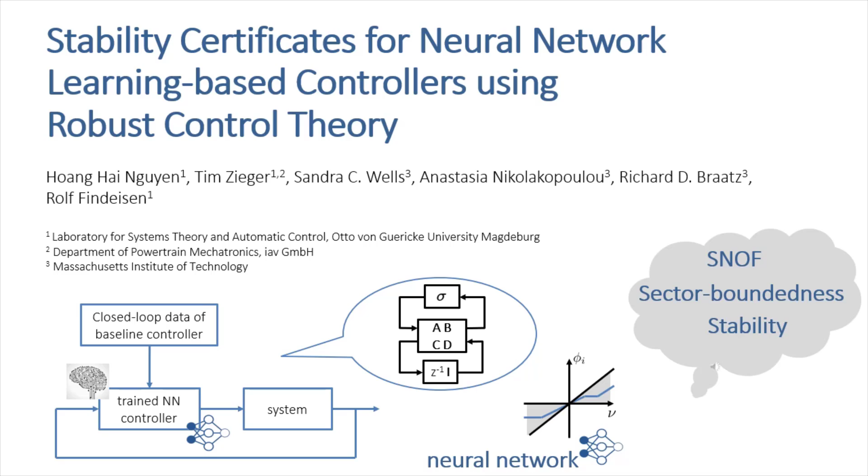In practice, we have many systems that are operated by a baseline controller that can deliver good closed-loop performance, and the nominal model of the plant can be obtained, but a mathematical description of the baseline controller is unknown. An example might be a human operating a car, where the dynamics of the car can be modeled sufficiently well, but a mathematical model of the human control actions is not available.

Or it can happen when baseline controllers are only available in hardware, as they have been designed a long time ago or by a different person, and we want to imitate the behavior of such a controller to implement on new hardware or to expand its range of operation. Another case is the existing baseline controller may be computationally expensive, for example MPC, which prevents us from using it in very fast or low-cost systems.

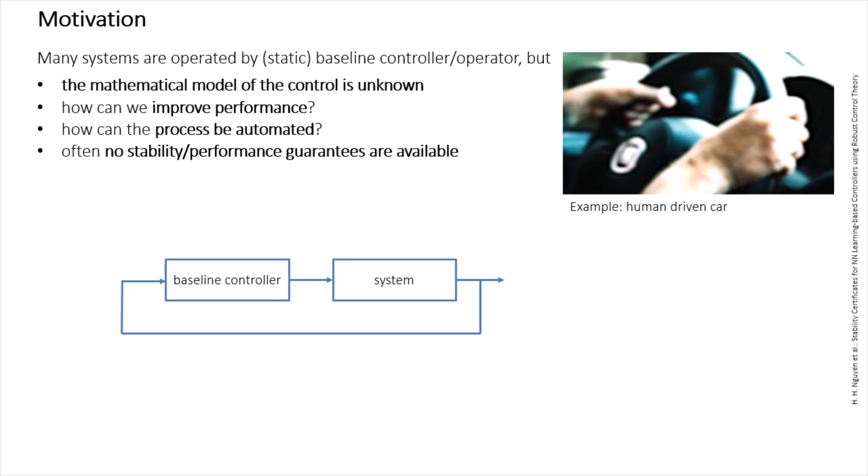In those scenarios, how can we improve performance and automate the process? And often in these cases, no stability guarantees are available. So the idea is we may want to approximate the baseline controller with a trained static neural network to imitate the baseline controller, for example the human operator as mentioned before, to decrease the computational load of the controller, and we can combine data with simulation.

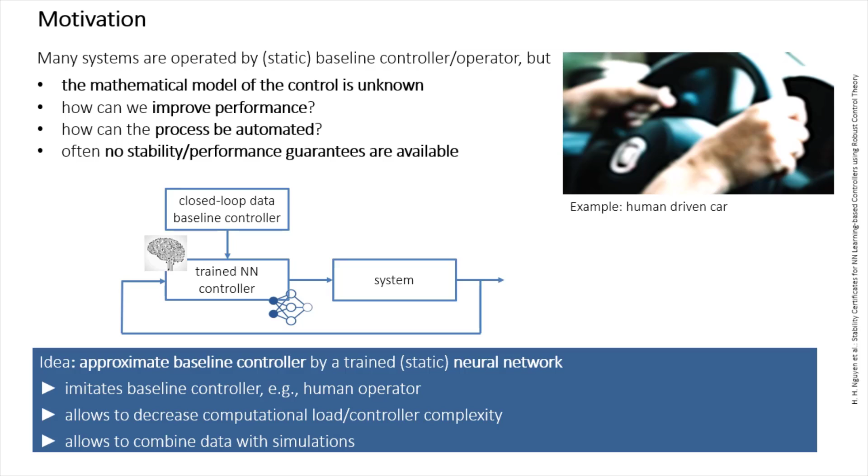So the first question is, can we verify performance and safety guarantees for the nominal system with a neural network learning-based controller? Second, what is the sensitivity and robustness of the system when it operates under disturbance? And last but not least, can guarantees be embedded in the training?

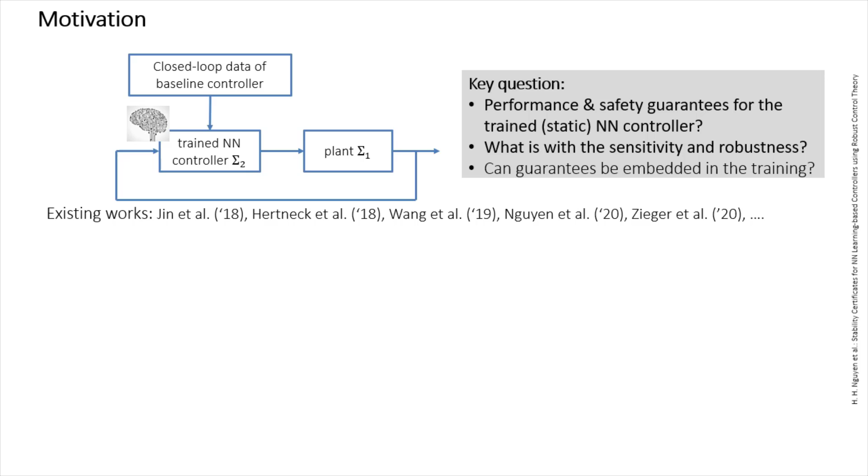There are several works that look into this direction and solve the problem for learning a specific type of controller or specific type of neural network. Can we have a framework to solve the problem? So we propose a different approach by using the tools from robust control theory.

We can use the fact that the most commonly used nonlinear activation functions for neural networks are sector-bounded, or can be transformed to be sector-bounded by using loop transformation techniques, and the slopes of those functions are also bounded. Basically, we reformulate the closed-loop system in the form of a diagonal nonlinear differential inclusion, or Lur'e differential inclusion, which means we decompose the closed loop into static nonlinearity and dynamic system, and use robust control stability results for controller verification.

The approach is motivated by the framework of Kim and others in 2018, which considers the stability analysis of open-loop dynamic artificial neural networks, where the neural network has one hidden layer only. Here we have extended the result to the case that the network can have more than one hidden layer, which includes the case of deep neural networks, and applied it to verify the stability of the closed-loop system.

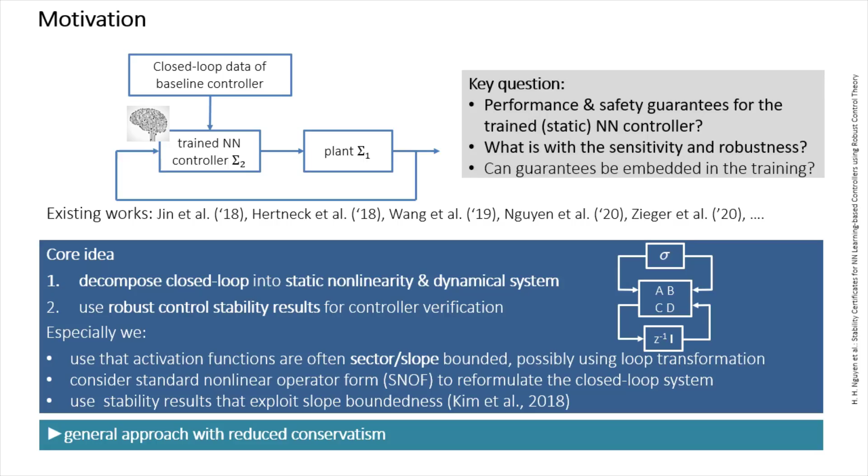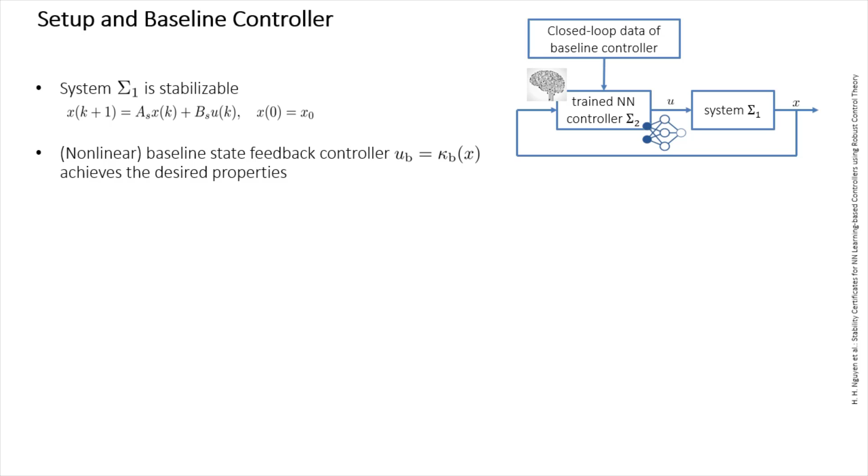The system to be controlled is linear, and we assume that the matrices A and B are known. The system is stabilizable and all states are observable. Assume that we have a baseline state feedback that achieves desired closed-loop properties, and then we can obtain a data set from this baseline controller to train the network that acts as the learning-based controller.

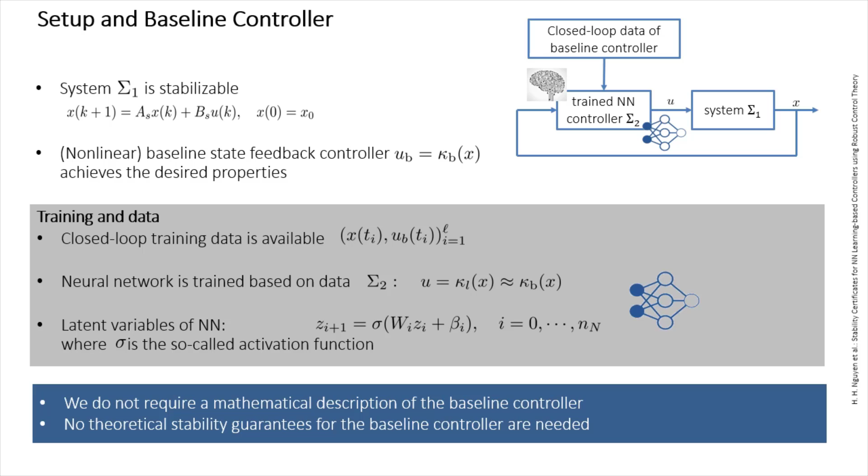By doing this, we don't need a mathematical description of the baseline controller, and we also don't require that the baseline controller provide theoretical guarantees, such as nominal closed-loop stability. For example, in the case of the human driving the car we mentioned previously, we want to imitate the behaviors, but the driver cannot provide any provable stability of the system from a theoretical perspective. But by using our approach, we can still verify the stability of the closed-loop system while imitating the behaviors.

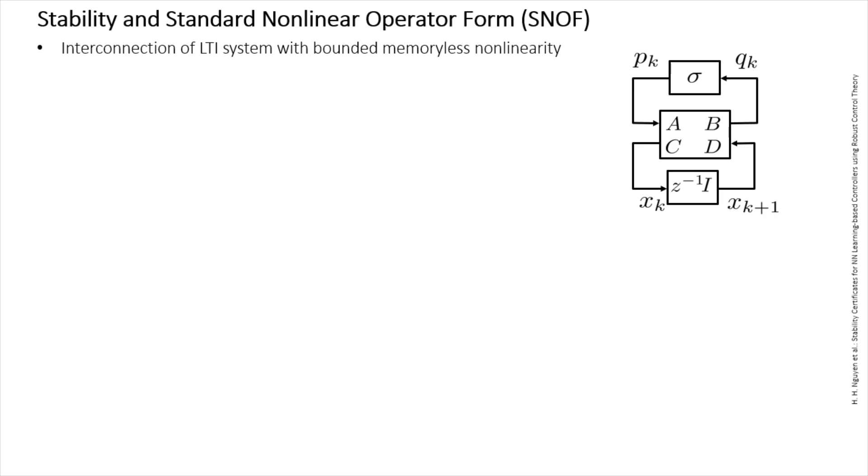The stability of systems with sector-bounded nonlinearities has been investigated since the 1940s. Such systems can be represented in the standard nonlinear operator form. So the SNOF is an interconnection of a linear time invariant dynamic system in feedback with a bounded memoryless nonlinearity, and it can be presented as in the figure.

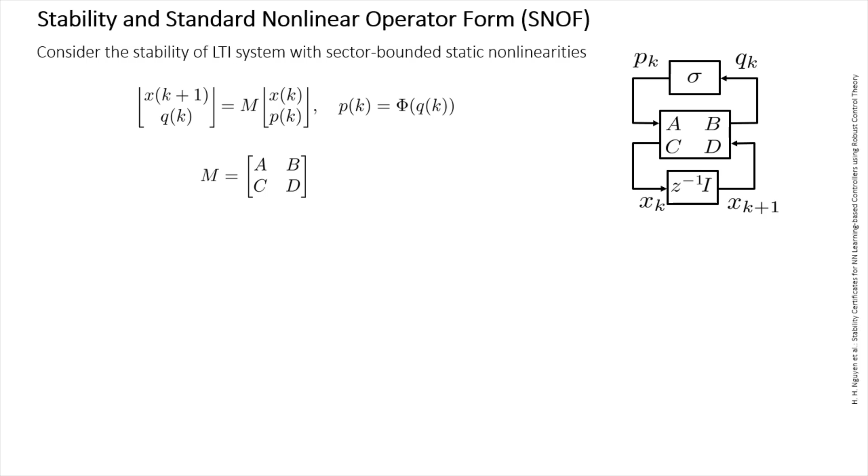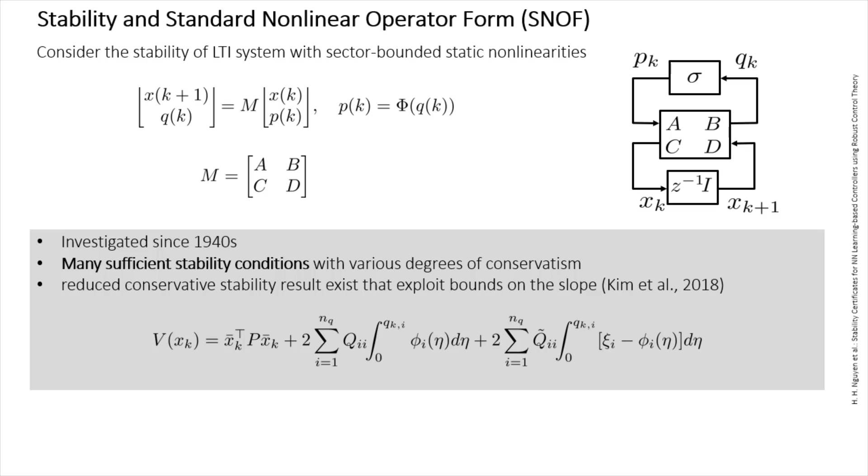Many sufficient stability conditions with various degrees of conservatism exist. By taking into account the bounded slope of the nonlinearity function, Kim and others in 2018 derived sufficient stability conditions that were less conservative than other methods. The basic idea is that in the Lyapunov function, a third term was added that reflects the bounded slope of the nonlinearity, and in this paper they conducted several benchmarks to compare the results with other approaches, showing that the results obtain the least conservatism.

So now the questions are, can this be used for neural network-based controllers in a reasonable way? And are neural networks slope sector-bounded?

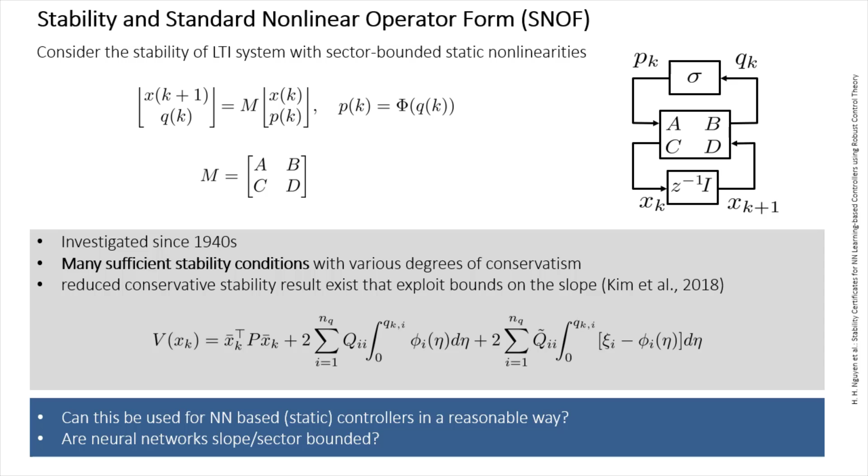So we can talk about the sector-bounded and slope-restricted nonlinearity. If we define the sector-bounded phi as being the region from 0 to xi, it means that it includes all the functions that lie in the region between the x-axis and the linear function that has a slope xi, which means the gray area in this figure.

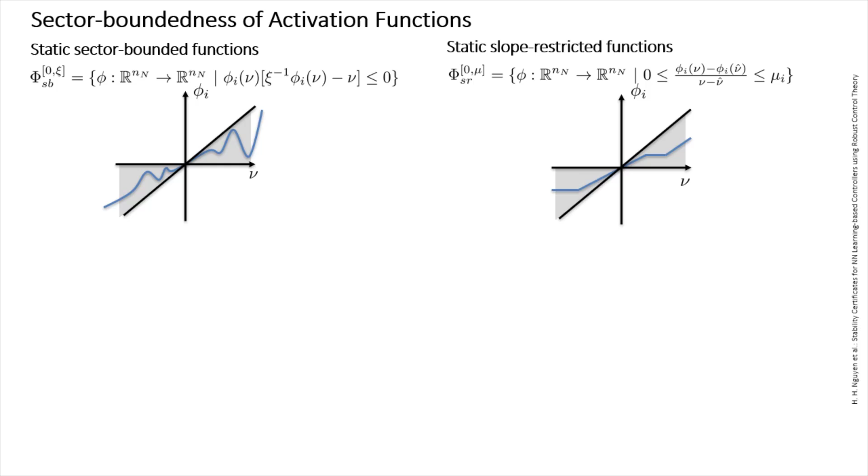And if we define the function as slope-restricted in the region from 0 to mu, it means the slope of the function is always in the range from 0 to mu. With these definitions, we can see that the ReLU and the tanh hyperbolic function are both sector-bounded and slope-bounded in the region from 0 to 1. But the sigmoid function is only slope-bounded, as you can see in the figure.

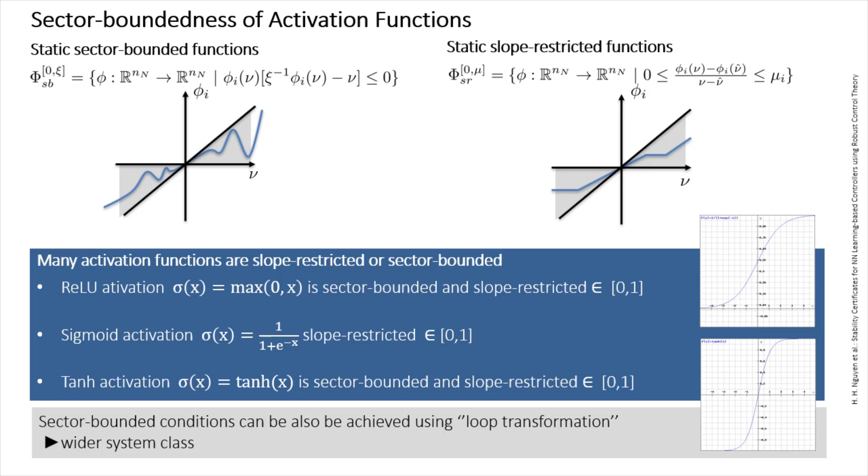However, there is a technique in nonlinear control called loop transformation that can transform this function into the sector-bounded function. So first, we need to reformulate our problem into the SNOF form and then apply the result for SNOF.

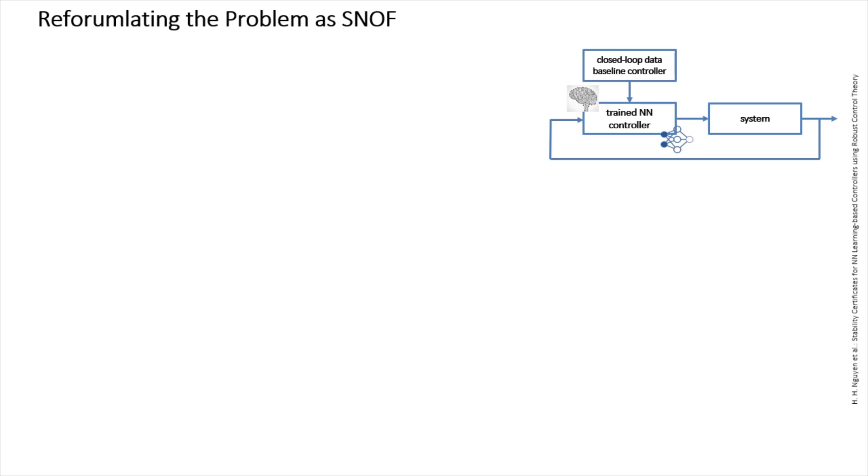The main idea here is that because the neural network contains both linear and nonlinear functions inside, we will use some auxiliary variables such that we can pull out the nonlinear function and separate all the nonlinearity into one part, and the other part only contains linear terms.

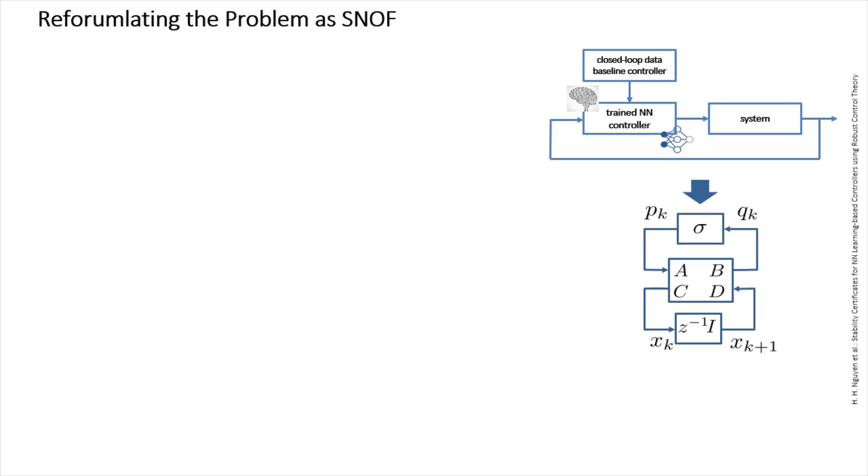Okay, so this is the equation describing the neural network variables. We can use the variables qi and pi here, and we can write the dynamics of the closed loop system in a big block like this.

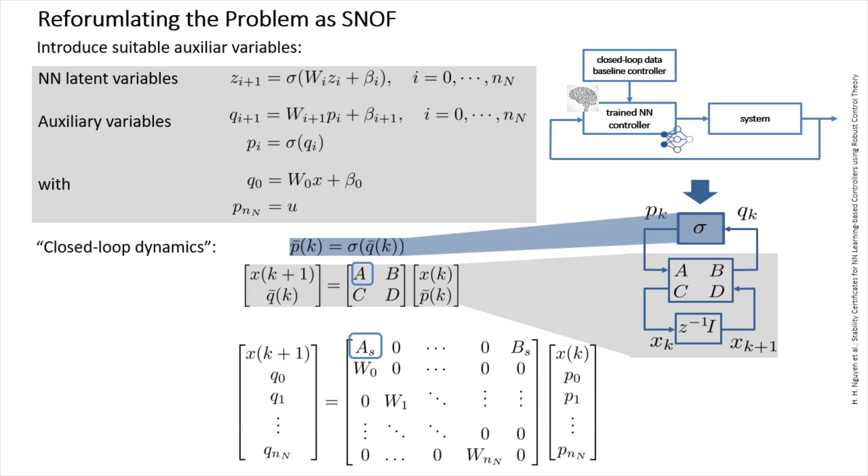If we compare it to the SNOF form, we can see that the matrix AS is corresponding to the matrix A, the block in yellow is B, the red block is C, and the green block here is matrix D. And this is the main result of the paper.

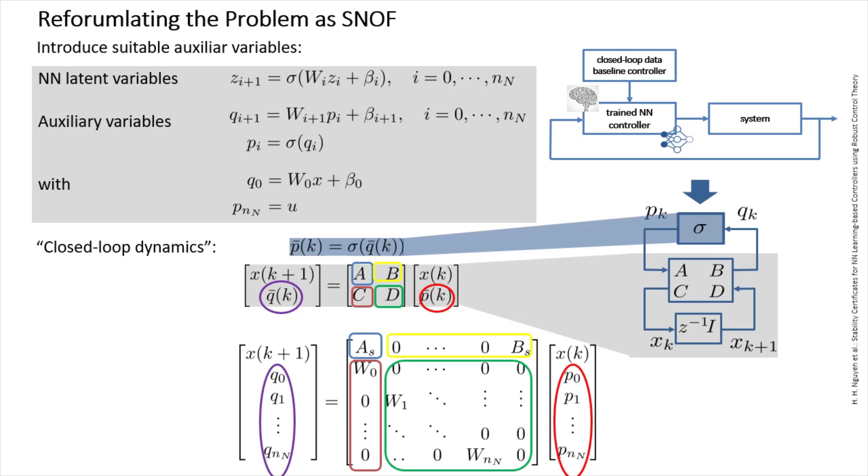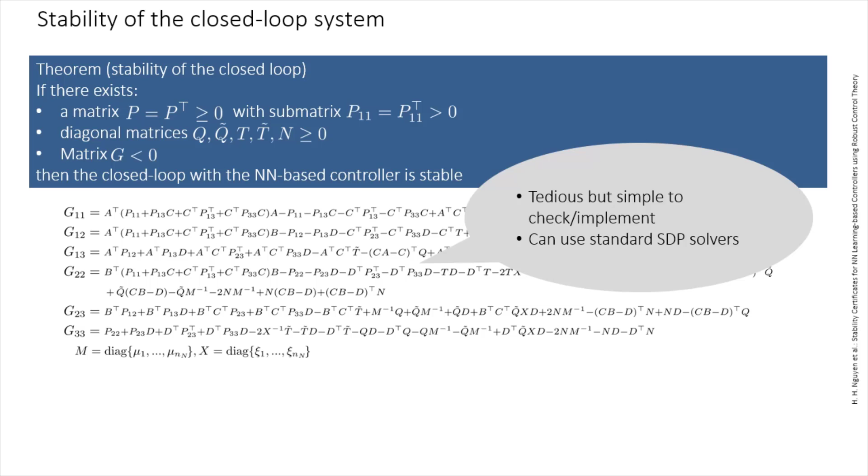And the matrix G is shown here, although it may look complicated, it is actually simple to check with many available solvers for SDP problems. From this result, we can extend it to compute a convergence rate by formulating it as a generalized eigenvalue problem.

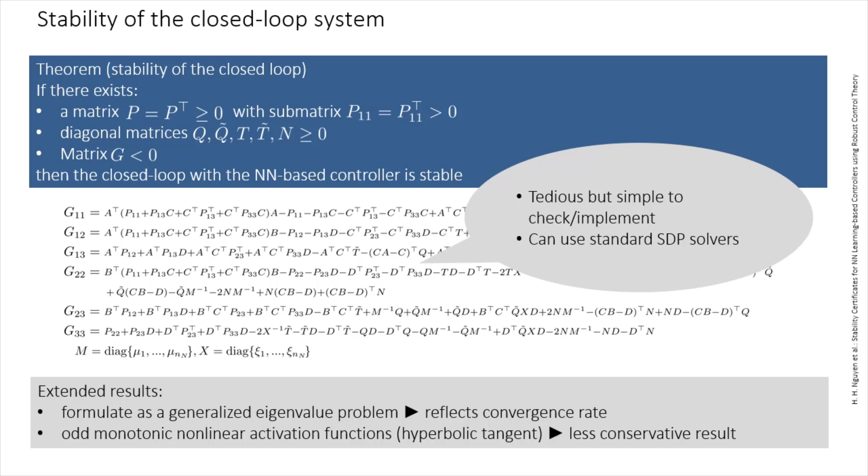The second case is when the nonlinear activation function is an odd function, for example, hyperbolic tangent. We can have a less conservative result. The details can be found in the paper.

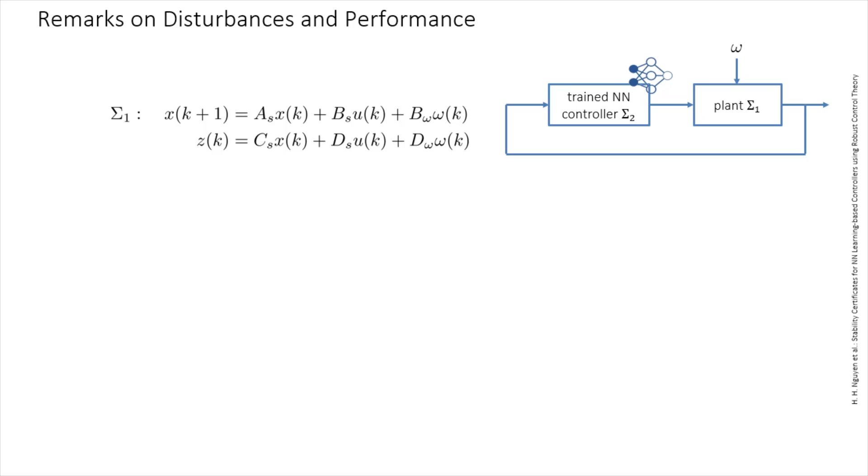Now we consider the case when the system is under disturbance. Omega here is a bounded disturbance that affects the system. The L2 gain of the closed loop system is defined as the supremum ratio between output and input. Basically, the L2 gain of an input-output system describes the maximum gain in energy transmission from input to output.

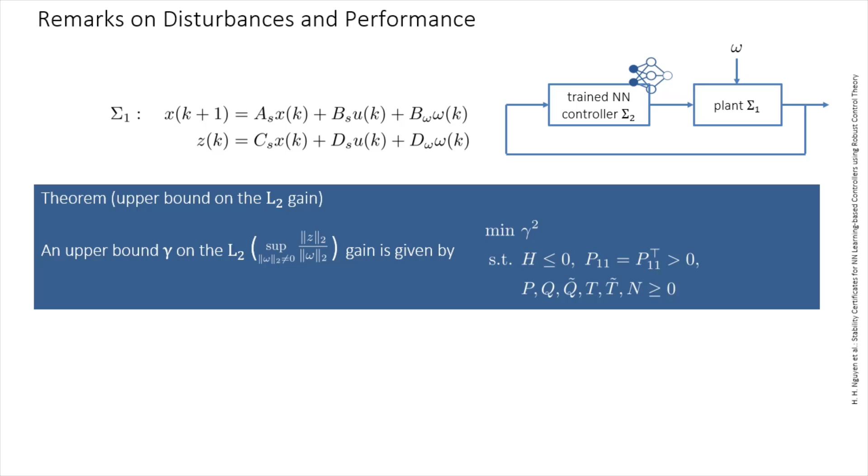So the upper bound gamma of this gain can be obtained by solving the optimization problem, in which the matrix H here is like an extended version of the matrix G before, and the details can be found in the paper. So this result allows us to analyze the robustness of the closed loop system.

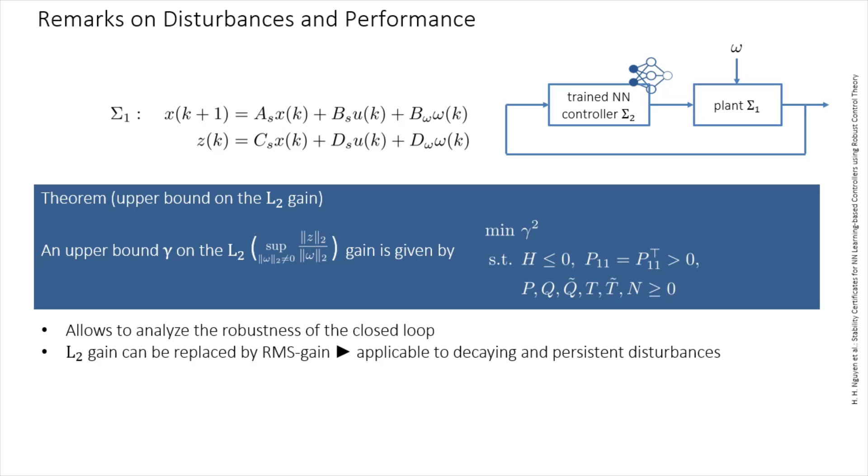We can replace the L2 gain with the root mean square gain and obtain similar results. So this condition can be applied for both decaying and persistent disturbance.

We have implemented an illustrative example in which the plant is the interior permanent magnet synchronous machine. The disturbances are summarized in D, for example, the flux change. The baseline controller here is an MPC.

So we want to illustrate this scenario. The MPC performs well without theoretically provable stability, and we want to imitate this controller and verify the stability of the learning-based controller. The neural network we use here has 5 hidden layers, and each hidden layer has 5 nodes.

We do the simulation with the neural network-based controller. Several control and state trajectories with different initial conditions have been plotted, and it shows convergence, performing similar to the MPC controller. The stability of the closed-loop system is only proved by using our results.

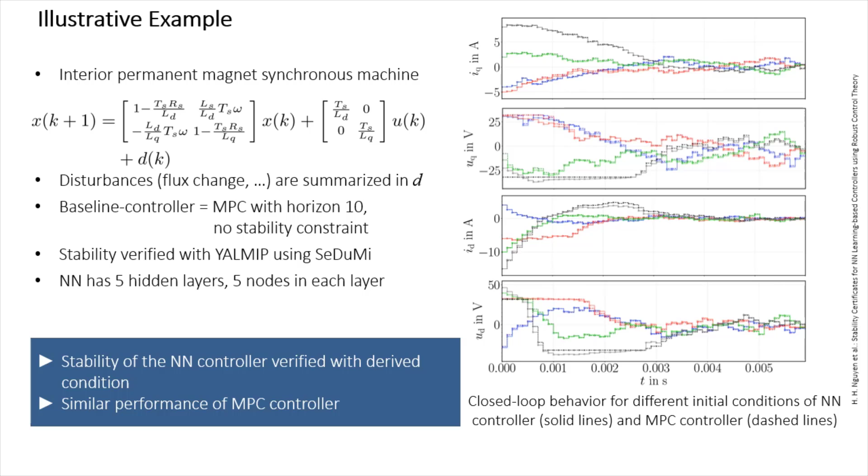So, in conclusion, we have used robust control theory to derive sufficient conditions for the certification of nominal stability of a system controlled by a neural network-based controller. We use sector boundedness and slope restrictions, and the baseline controller does not need to be available in mathematical form. It can be efficiently evaluated using standard solvers.

We also can derive L2 gain performance bounds, which help us analyze the closed-loop sensitivity and robustness. The outlined results and ideas are only the first steps for a more general framework.

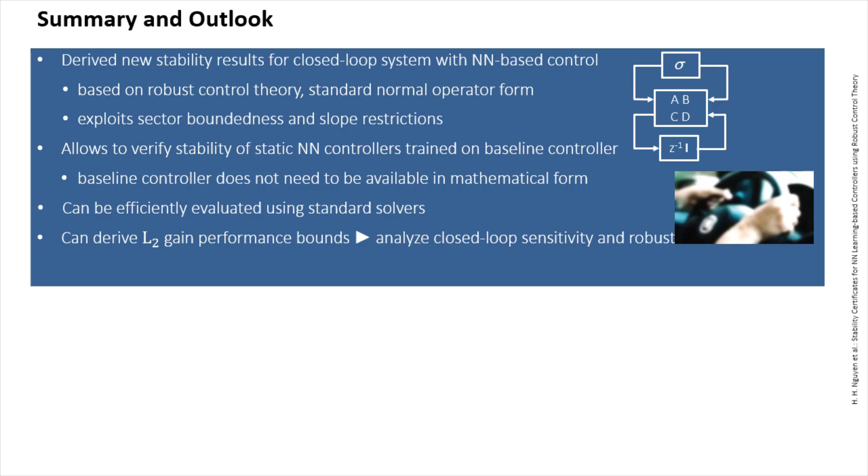This approach can be extended to a class of nonlinear systems where the nonlinear functions satisfy Lipschitz continuity, and different types of neural networks such as recurrent neural networks or residual neural networks. We can extend to the output feedback control case. And finally, the stability conditions can be enforced during the training process for the neural network.